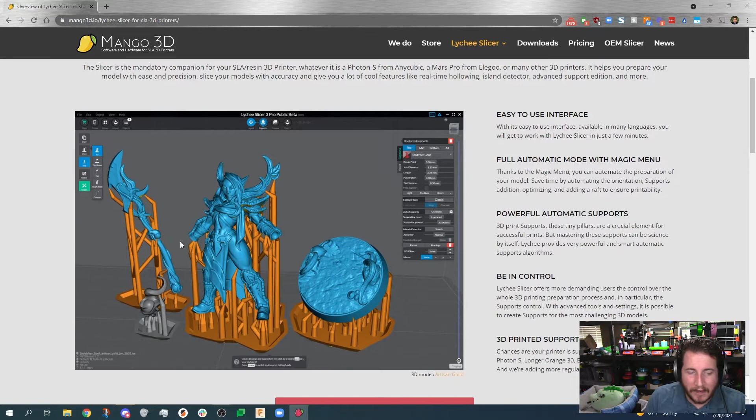But I wanted to take you through their website real quick because a lot of their pictures and demonstrations are actually really nice. We can see here that they do some sort of overhang check. Really nice support generation with what appears to be settable pads, as well as an angle on the side of it to help you scrape under it without stabbing yourself in the hand. Because we all know we've never done those things before.

But Lychee Slicer doesn't have to be free. They do have a paid version, and let's figure out the differences between them. So we're here on their pricing page, and we see all you really need for the hobbyist is the free one. Now, mind you, their yearly subscription is only like €30 a year. It's not that bad, but you do see that you don't have advertising before slicing. They do support advanced editing mode, sure.

This is a nice feature that I wish they had on the free, which would be multiple options for support management, tips, base, shapes, etc. Because this is all possible in most of the other free slicers. They also don't enable hollowing without paying, and that's a bit of a bummer. It kind of is what it is.

You get more raft types, more pixel perfect modes, variable layers, which I don't know why you would want that on resin. I think realistically, if you're going for resin 3D printing, you may not be that concerned about time. You're way more concerned about the quality of the prints. We don't pay for it, so I couldn't tell you where it would matter, but if you know, let me know in the comments down below.

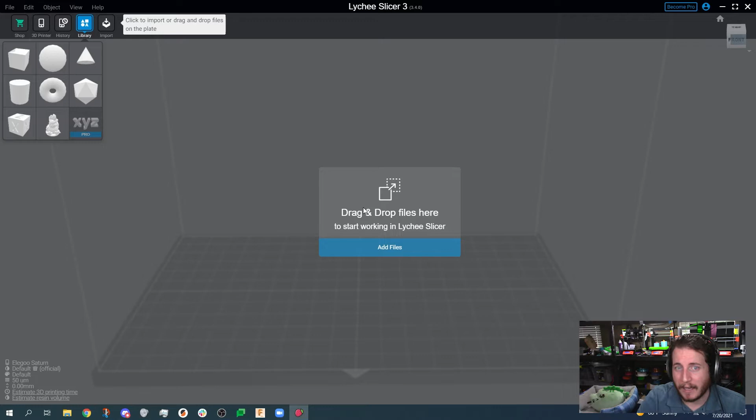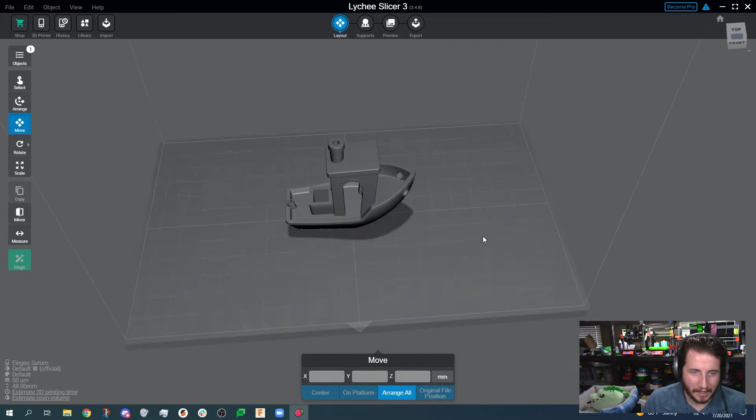So let's grab ourselves a Benchy. All right, we're loading in our Benchy. It moves you, which is kind of weird. Let me see. Does the 3D mouse move? Oh, heck yes, it does. Some of those things are not the way I'm used to them being. But that's okay. We're not going to use the 3D mice. But it's cool that it lets you do it. It's going to take me some time to set it up, so I'm not going to bother with it right now. All right, so we got it in here.

It's giving us some settings down here. We have that it's Elegoo Saturn, our default, which is all the settings and things. Let's take a look in here. Burn-in layers, we have 6. I like to go to 10. Better to have too much than not enough. Exposure time of 25 seconds. 35 should be more accurate. You know, let's go down to 8.

35 seconds should be more accurate. Transition layer count, yeah, we'll do 3. Lift after print is 8. Lifting speed is 90. Burn-in's 90, that's fine. Layer thickness at 50 microns. This is very normal, right? 50 microns is where generally most of us will be for resin printing. Yes, it is considerably lower than what you do for FDM 3D printing. This is fine. Light off delay is good.

Exposure time is a little high. For most resins on a Saturn, 2.75 is good. Lift after print 7. I'd rather have too much than not enough. All that the lift does is make sure that it pulls your part out of the vat to allow the resin to come in under it, basically to allow capillary action to fail and allow the resin to reflood, so when your part goes back in, there's a nice layer of resin for it to expose.

Our lifting speed is 100, that's fine. Lowering of 150. These base settings are actually pretty darn good. I do wish we had this. It's only available on Pro, but this is nice. You will have shrinkage. You will absolutely have shrinkage. Or expansion, depending on your type of resin, but generally it is shrinkage. And the compensation allows you to fix that.

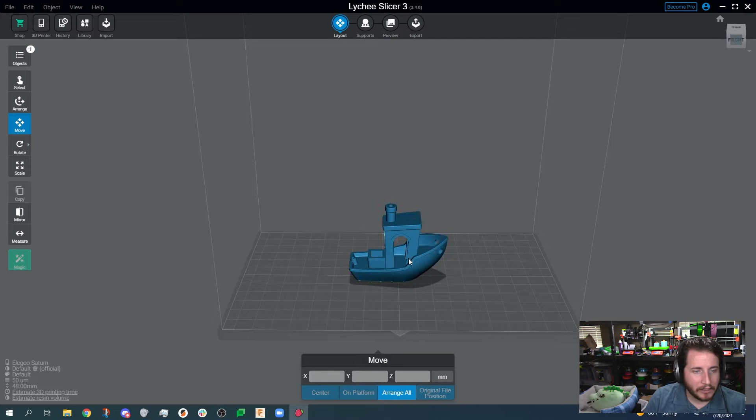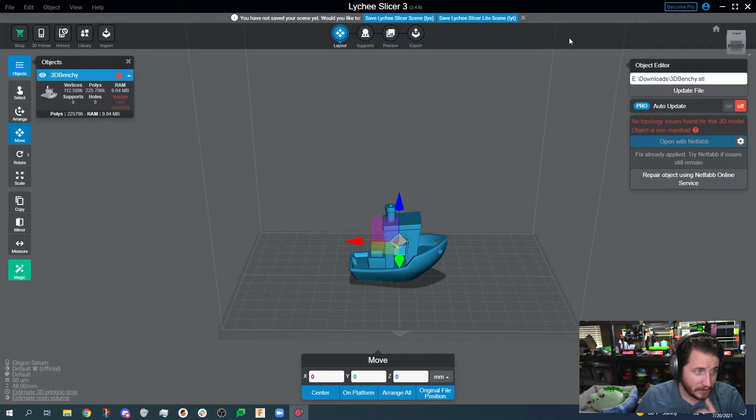We see that it is non-manifold. However, if we use Netfabb Online, it will require us to log in. Bit of a bummer there. There's not much we can do about it. The Benchy itself is not a clean model, and it does, unfortunately, need to be repaired. We're going to slice it as it is because we're going to be using this program the way that it should be used. Let's look at getting this thing rotated and auto arranged.

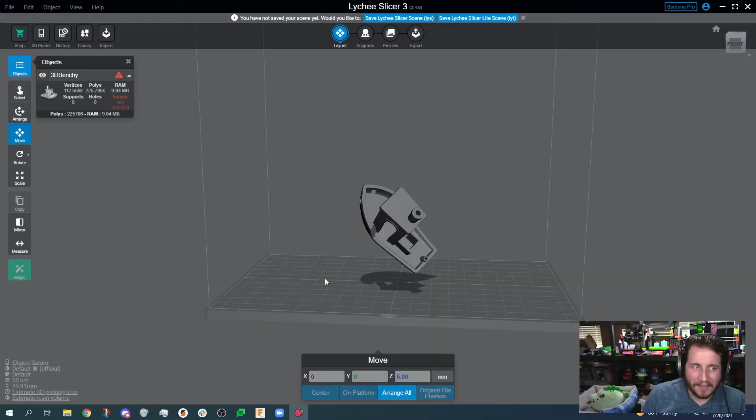So let's click auto orient and see what we get. This is more what I expect out of an auto orienting slicer. If you're wondering what I'm talking about, we talked about PrusaSlicer previously. We'll card to it right there, where its auto orient feature doesn't orient the way that I would expect. This is much closer to what I would expect. The model is already lifted off the build plate, so you know where it's going to end up. They have reduced their cross-sectional area as well as the amount of material that touches the build plate.

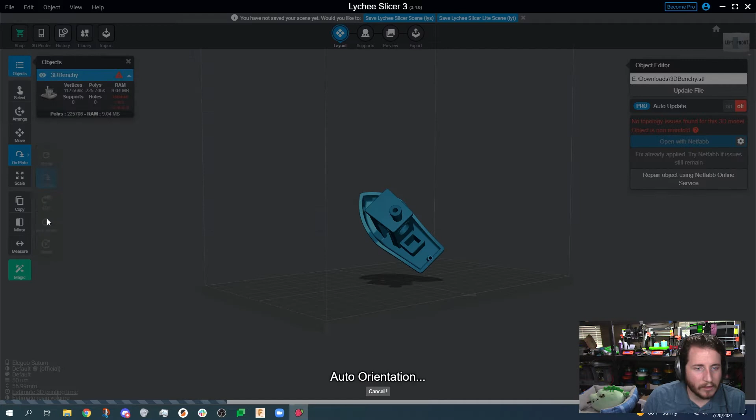This is all nice. Now let's do this one more time, see if auto orient changes it again. So all they're doing at this point is basically rotating it. It might have come down a little bit. Let's do one more auto orient. Yeah, so every single time that we're choosing it, it is actively finding a new home for this model, but you can see the base of it is angled to reduce your cross-sectional area every single time.

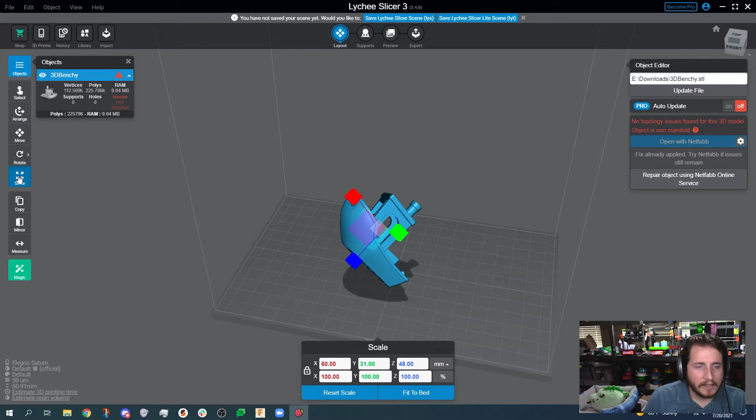We have an arrange feature. We only have one model, so it's not really a big deal. We have move, exactly the way you'd expect move to be, so grab it on any planes. Very nice. Scaling, again, exactly the way you would expect it to be. It also has a measure feature, which will let you come in and actually measure things, like from here, there, roughly 0.8 millimeters. Very cool. Let's see, what is magic? I'm feeling lucky. Support presets. Let's go with medium. I'm feeling lucky.

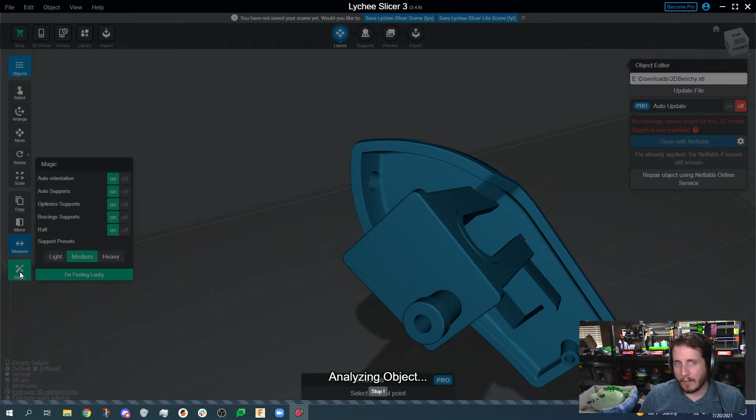This is a nice feature. This is something that Preform has, but not a lot of the other slicers do, or it just kind of does everything for you. And there you go.

There's your ad. So measure between 2 points is available only through the Pro subscription. Unlock all features of Lychee Slicer by purchasing a subscription. No, go away. There you go.

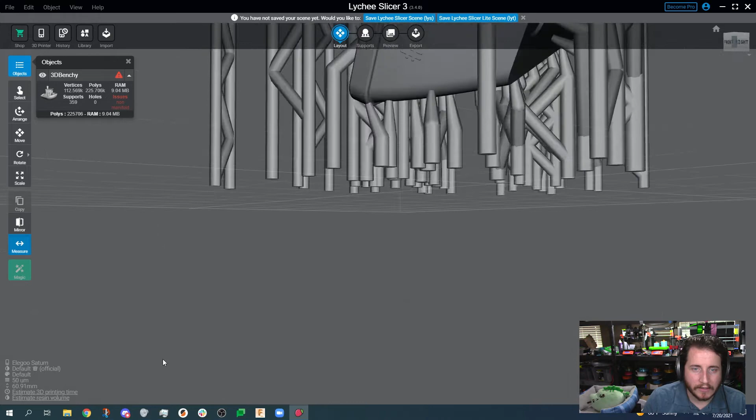That's what Lychee thinks is a good support. Oh, and I love that. You go under it and the pad goes away. That's really nice when you're trying to add support structure in. So bonus points to Lychee. This software is just really easy to use.

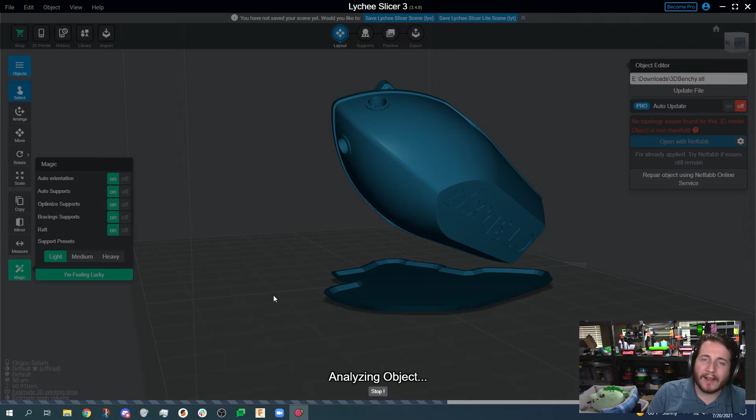Let's see what heavy support feels like on this model. Oh, it moved again. Right. It's going to orient itself every single time. Oh, that's kind of cool. You can actually see it working. Okay, so the support presets are the thickness of the support itself. I gotcha. I thought it was talking about support density. Light is fine.

Honestly, one of the better systems that I've seen in a long time outside of Formlabs. Formlabs has a really good system. So we have our layout up here. We can go over to supports. And this is where Lychee Slicer, to me, wins, because this feature is awesome. It shows you all of your overhangs. It's awesome.

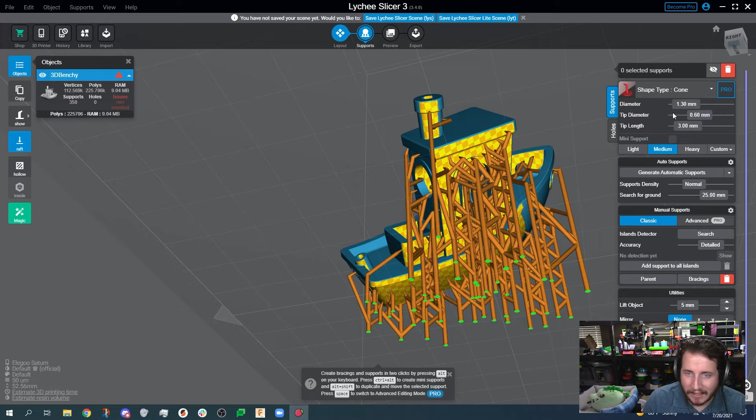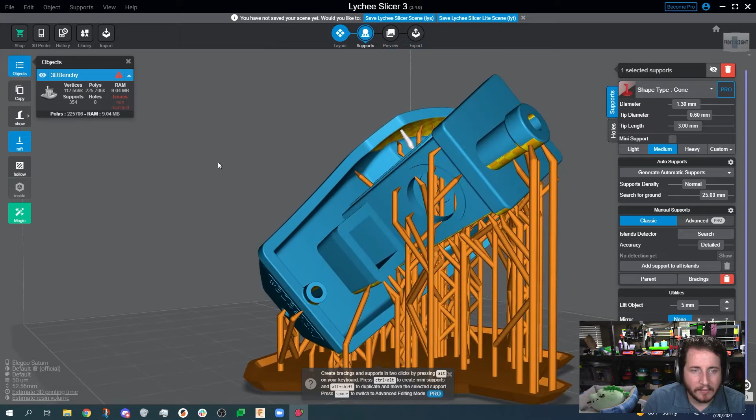Now, all we can use is the cone. The cross, the cube are only available for pro people. Is what it is. We can go ahead in here and just add in more support, and we see that we can actually change the thickness of our support material as we're adding it. And it shows you some areas with overhangs. Shouldn't be that bad for us. Just kind of add things in. Beautiful. Unfortunately, we can't go into their pro settings, but that's all right.

We can search for islands. Let's see what it finds. I don't think it's gonna find anything. Okay, so we've got some that it's pointed out saying, hey, ding dong, you got an island right there. Let's go over to a light support and, there we go. And see, as soon as you click it, the island goes away.

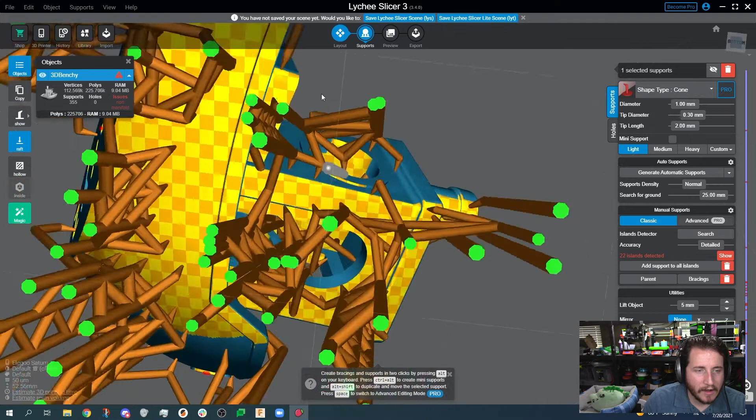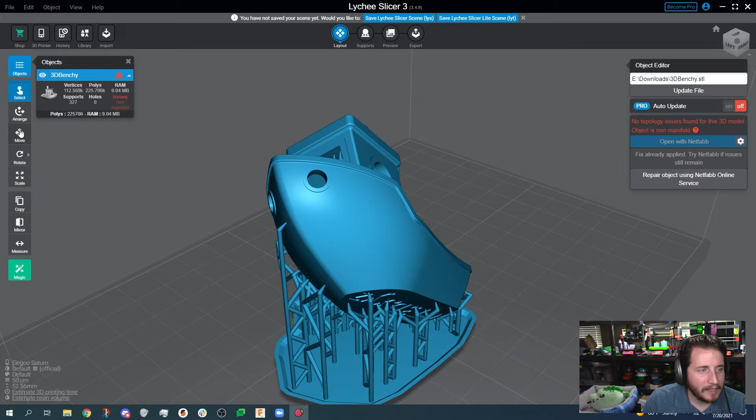We've got some other islands here on the actual logo itself. I don't think these are that big of a deal, but we can add it on there just for the sake of this video. That is so freaking nice. This orientation is probably not a great one. We'll go back to layout, go to rotate, go to auto orient. Yes, it's going to remove some of the supports. All right, it's deciding that this is the orientation that we're using.

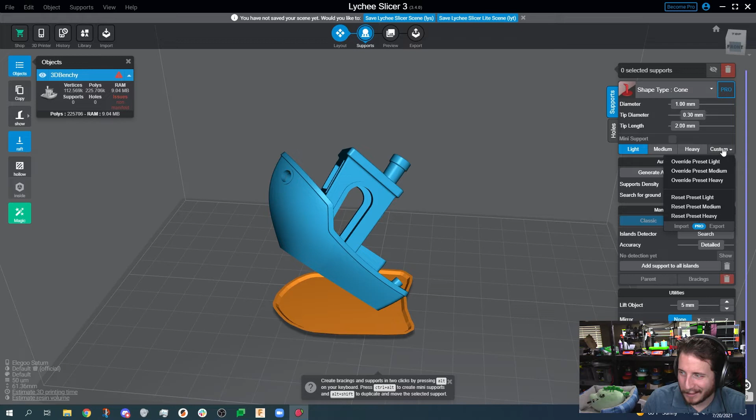So we'll go over to supports. Now let's do normal density, light supports, tip diameter 0.3. So the one thing that I can't see right now is how far the tip penetrates into the model. Now, they may not allow you to set that. It's probably not that big of a deal. So let's do our generate automatic supports.

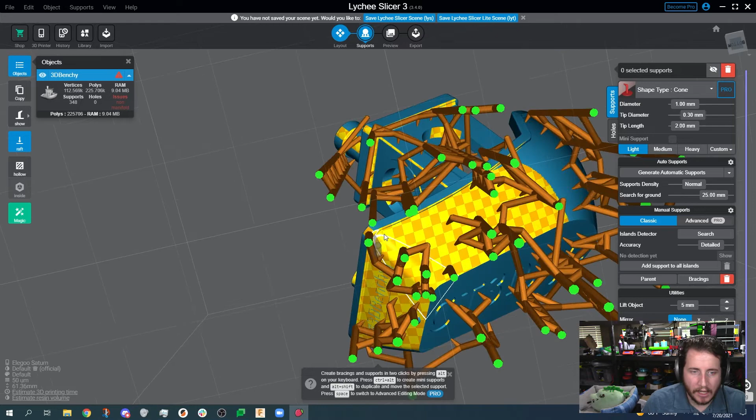112 supports added. 10 were not placed due to not finding a place to go. 5 island supports were added. 0 island supports were not placed. 57 supports optimized, 200 braces added. That's great. I love that it shows you those things. It's beautiful. We can do one more time, search for islands.

It's funny to me that it doesn't pick up the island right there. This one will absolutely need it. That might need it. That one's gonna need it. Oh, and see, I didn't click this in the right spot, so it's telling me, hey, it's not right.

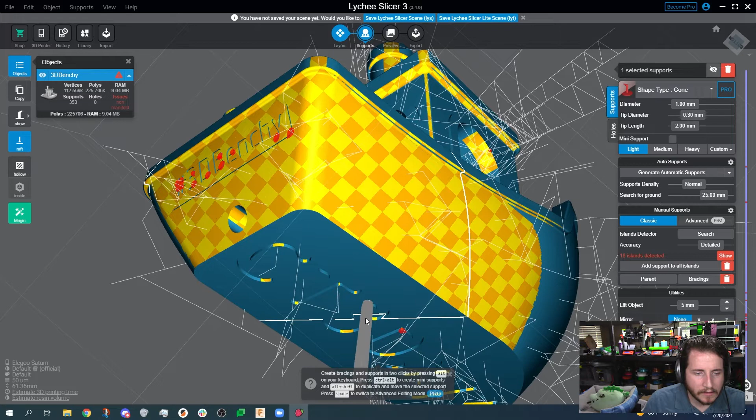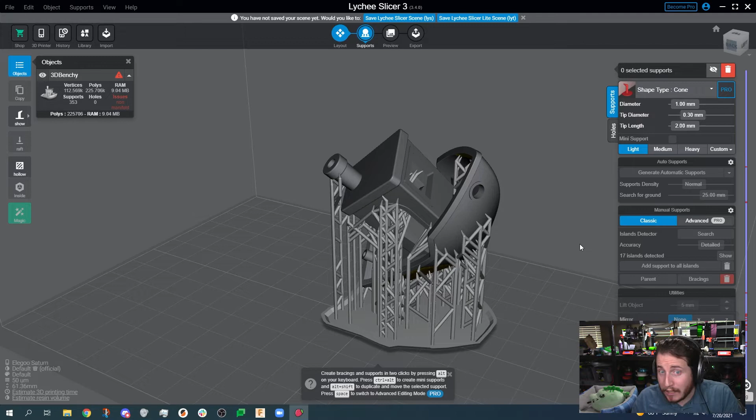So, there, beautiful. This is truly the way that I feel resin slicing should be, where it shows you everything that you're dealing with, everything that you can expect before you go to slice it. There are very few programs that do this, so hats off to Lychee in their free version to let you do this.

Can we hide supports? Oh my gosh. Oh, that is so nice. That lets us really see things. We can bring them back in, so we can grab that little tiny one right there. Boom! All right, let's go over to preview. That just shows us what our model is going to look like when it's printed. And then we can go straight to export. Like, that's it, ladies and gentlemen.

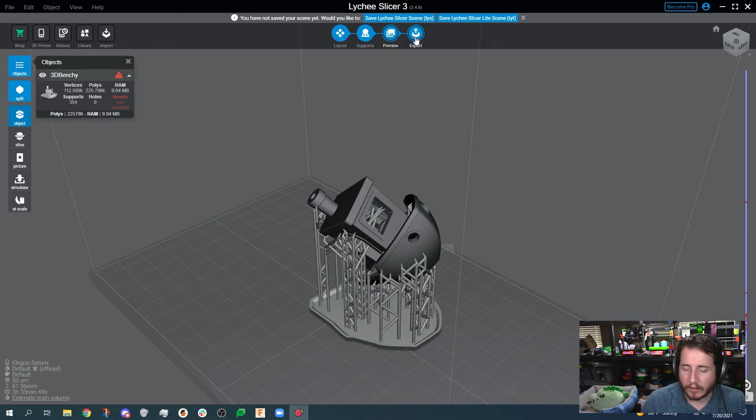We can estimate resin volume. Let's do that. 19.26 milliliters or 77 cents worth of cost. And it's estimating a 3 hour, 33 minute, and 49 second print. I like this. Now, if we look here.

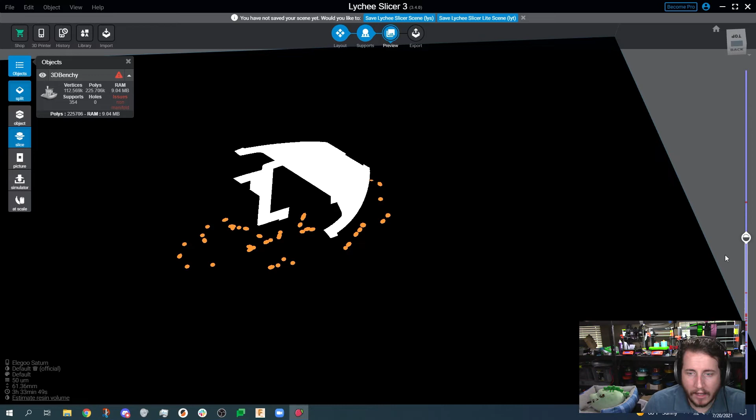Oh, wow. Let's get this thing sliced. Let's take a look at it. Oh! Is that slice by slice? No kidding. Now that is nice. Some of the other slicers let you do this, but not this way. Not this way. That's really cool.

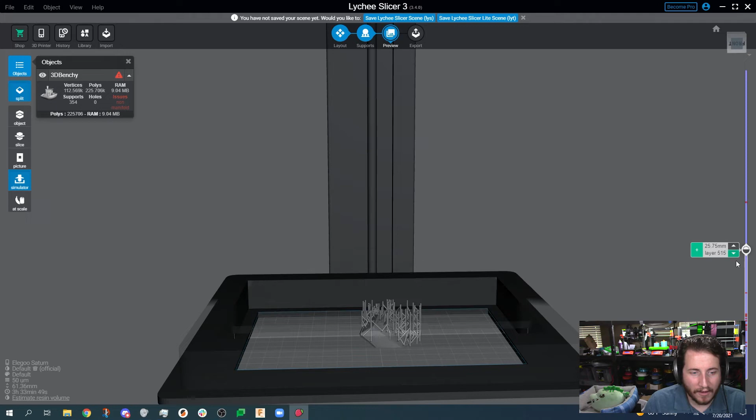Picture, I guess, lets you choose it from a picture. I can simulate? No. Dang, that might be cool from like a video perspective, like to show you how resin printing works. Oh, that is so cool. All scale. It's got a banana for scale! Yes! Beautiful. Beautiful, beautiful, beautiful. Guys, this slicer is honestly pretty darn great.

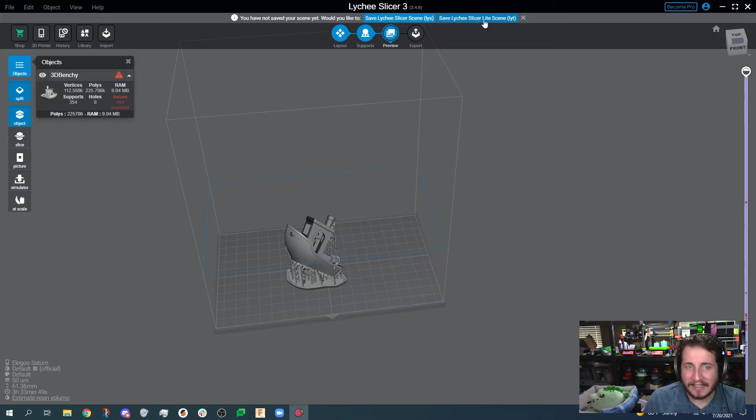You can save the scene as a Lychee Slicer scene or as a Lychee Slicer Lite scene. There you go. You can go straight to the export. It's an Elegoo Saturn. We can turn on anti-aliasing, which is nice. Normally 4 is what you want. Don't care about it for that. It uses the CTB. We have our export. Ooh.

Now we're going to get our 17-second ad. Are you kidding me? All right, well, it is what it is. You have to deal with the ads.

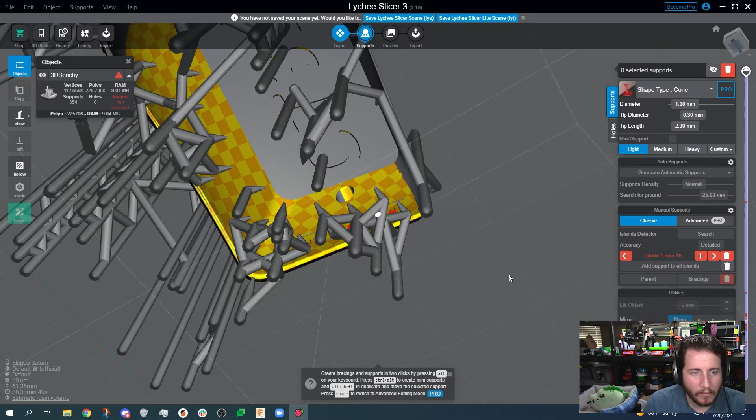Continue. First off, there are 15 islands not supported. Your print could fail. That is beautiful. What I'm trying to do is see if it is actually supported or not. So let's do that. We're going to export it. That's fine. I want it to show me those islands. Oh, baby, that's beautiful. This is probably not going to cause it to fail. I'm not too worried about it.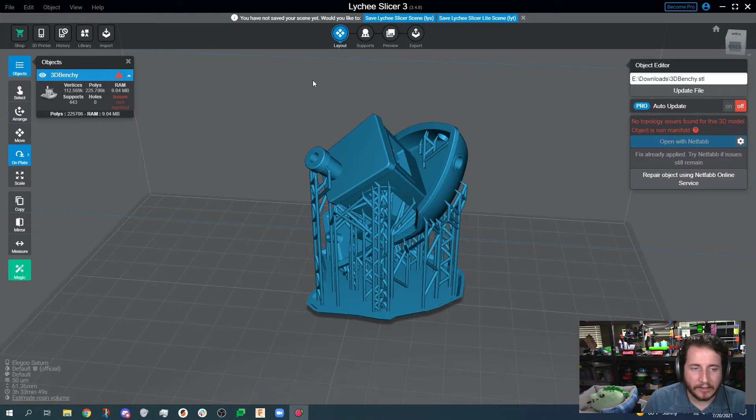Boy, you can even connect them together as a single parent. Dude. Bracings. I'm gonna give Lychee Slicer a lot of credit. Their entire algorithm is, they clearly spent a lot of money on this. I'm gonna bring in the model from Lychee Slicer. Let's see if it's actually, heck yes, it is supported.

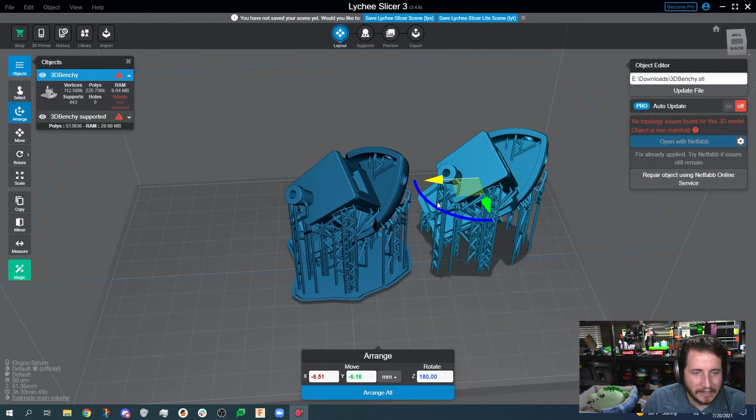Ladies and gentlemen of the jury, this is the second time that we have seen this in a slicer where the model can be exported with the freaking supports. This is awesome. Now, you don't need this for Lychee Slicer because it can do all the slicing for your other printers inside. If you're using Prusa Slicer, you have to export it, then move it into Chitubox, yada yada. This slicer solves that problem.

Man, I haven't sat in my chair and said, I don't mind paying them, until right now. $30 a year to add more on top of what you already get for free is amazing.

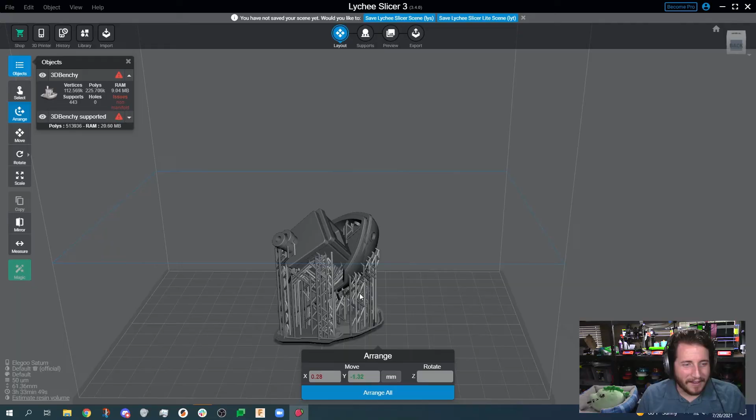So, this is awesome, guys. This also lets us try out the arrange feature. Oh, all right. Well, I mean, I guess that works too. And you can see it does join their bases together, which is totally fine to me. I don't particularly care about this. This is good, especially if you have a bunch of smaller models and they don't have a lot of contact area on the build plate. Joining their bases lets them all hold on one larger base rather than a bunch of small ones. Less chance of failure, basically.

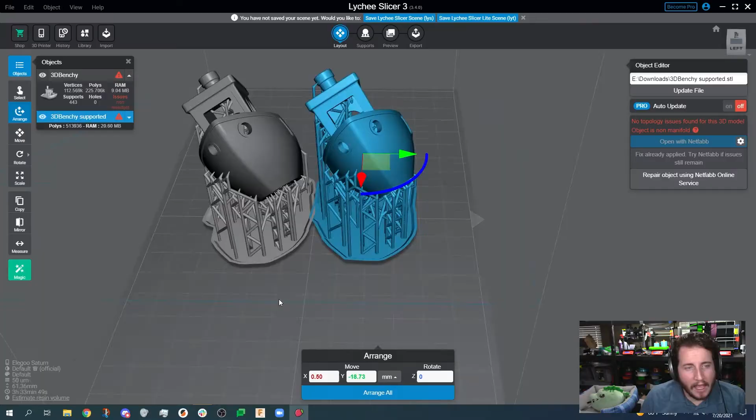And the one thing that I am noticing is on your regular 3D Benchy model, your supports are still separate versus the one that you exported as an STL, they're not separate anymore. So if you are going to export to an STL to maybe slice it in a different slicer, not that you would need to for whatever reason, because this, of course, does that, just be aware.

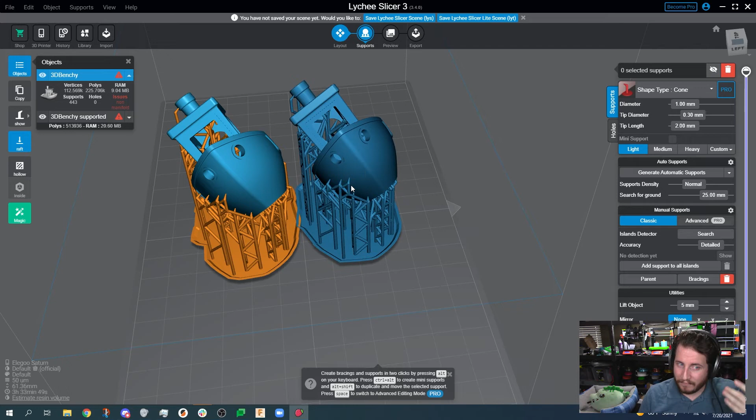We also have a holes feature. You can add holes. Oh, object is a hole. What'd you call me? That's cool. I'm sure that's also a precursor to the hollowing, which is unfortunately only available for Pro. But this is like one of those times where I'm totally okay with paying money for this.

This is really kind of my first good look at Lychee Slicer where I've given it more than, oh, okay, it's named after a fruit. And I really like it. I think you will too. I highly recommend you guys give it a shot. If you're not a business, you probably don't need the Pro version. And I think that their website's pretty darn honest that the standard version is more than enough for a hobbyist.

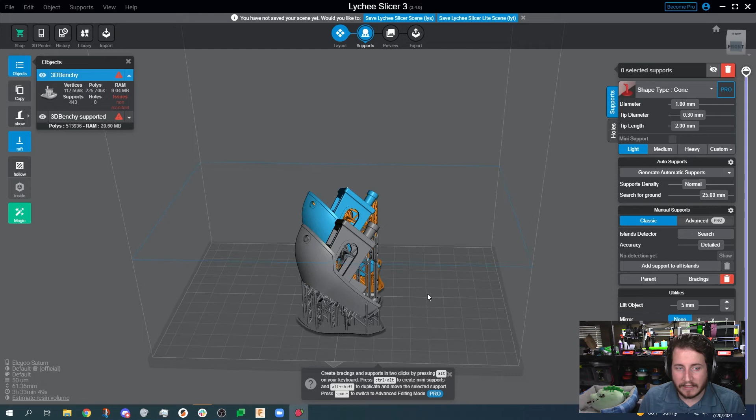But if you want more, if you want the 3D hollowing, if you want more rafts, if you want the pixel perfect, then pay for it. I don't see any reason not to support these guys. This is a pretty powerful slicer that can easily export to whatever file format that you want, which other slicers out there don't do, right?

Prusa Slicer does not export to anything other than an SL1. So if you want to use Prusa Slicer, you have to go through a bunch of hoops. Lychee Slicer keeps you from having to do this. But if you want to hollow your models, you have to pay them. Either way, I like this, and I highly recommend Lychee Slicer. I'm going to give Lychee Slicer like an A-, honestly. An A or an A-. It's very, very good. Recommended.

Absolutely recommended. Great UI. The tagline for this episode is, if Prusa Slicer and Formlabs had a crazy love child of software. Because this is basically what we're looking at. It's the user friendliness and ease of use of Preform without the $5,000 printer, but supporting open source 3D printers and software solutions inside of one. I like this, and honestly, this might become my new favorite resin slicer.

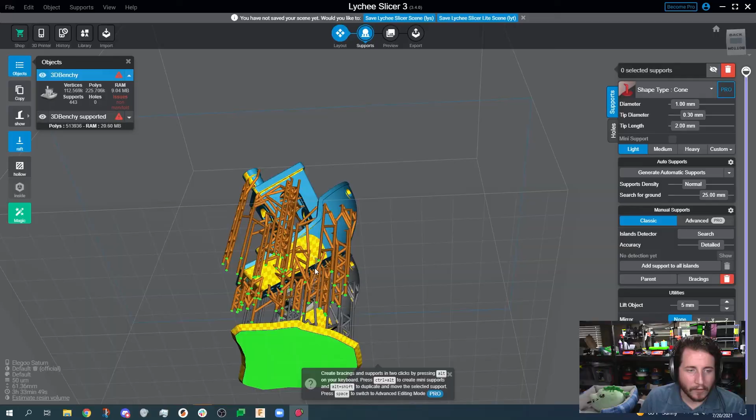The fact that it shows you where your holes are, it shows you where your islands are, it shows you everything that you need when you're working on the model. I mean, that alone makes it worth it. The fact that it shows you all of this makes it absolutely worth, well, totally free, but as a business, $30 a year. The amount of failed prints that you'll have because your support settings suck is more than I probably care to admit.